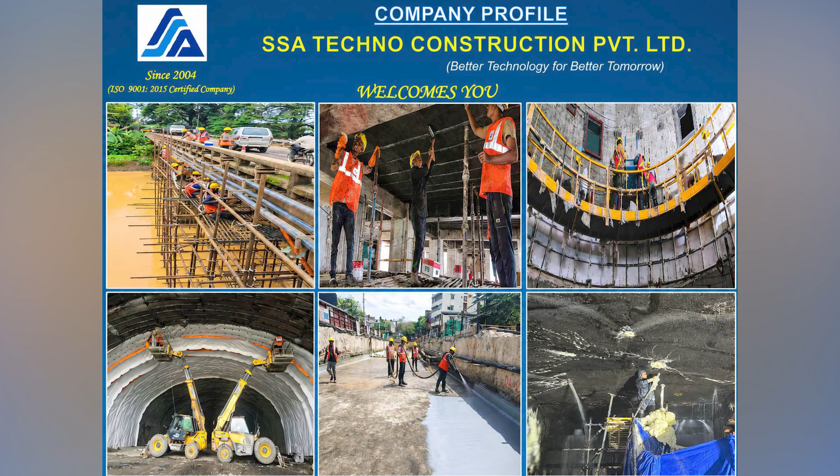Founded in 2004 by Mr. Ashok Kasana in a modest 10 by 10 feet room, SSA Techno Construction Private Limited has grown into a pan-India engineering powerhouse. With its registered office in Delhi and branch offices in Mumbai, Kolkata, Chennai and Patna, SSA Techno has successfully executed over 1,000 projects nationwide. The company boasts a strong technical team of professionals, engineers and supervisors, and a workforce of over 500 skilled and unskilled workers, making it a key player in specialized civil engineering services.

Core strengths: pioneers in specialized construction services, pan-India project execution capabilities, rapid and high-quality project delivery, cutting-edge technologies and materials, trusted by India's leading government and private institutions.

Verticals of excellence. SSA Techno operates across 5 major verticals, providing end-to-end specialized solutions. Structural rehabilitation of RCC and steel structures: projects include high-rise buildings, tunnels, dams, bridges, chimneys, airports, power and cement plants, and many more. Techniques: carbon fiber wraps, glass fiber wraps, laminates, FRP systems, steel jacketing, microconcrete, high-strength R4 mortars, etc.

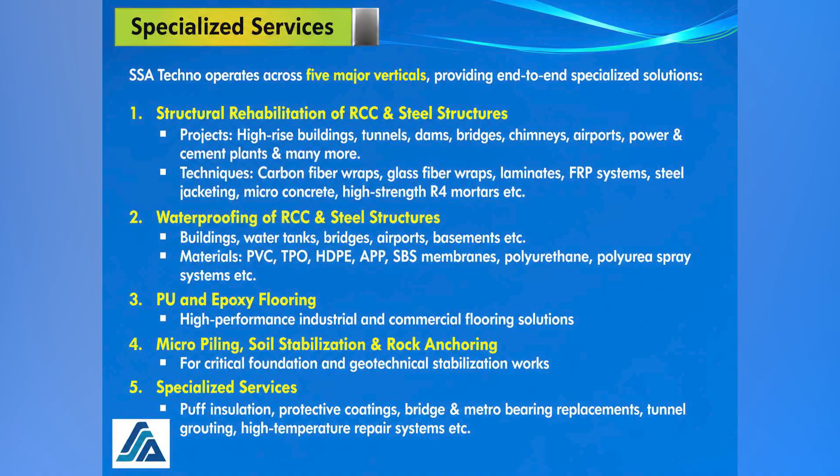PU and epoxy flooring, high-performance industrial and commercial flooring solutions, micropiling, soil stabilization, and rock anchoring for critical foundations and geotechnical stabilization works. Specialized services: Puff insulation, protective coatings, bridge and metro bearing replacements, tunnel grouting, high temperature repair systems, etc.

Business vertical contribution: 60% structural strengthening, 25% waterproofing, 15% specialized services, flooring, insulation, anchoring, etc.

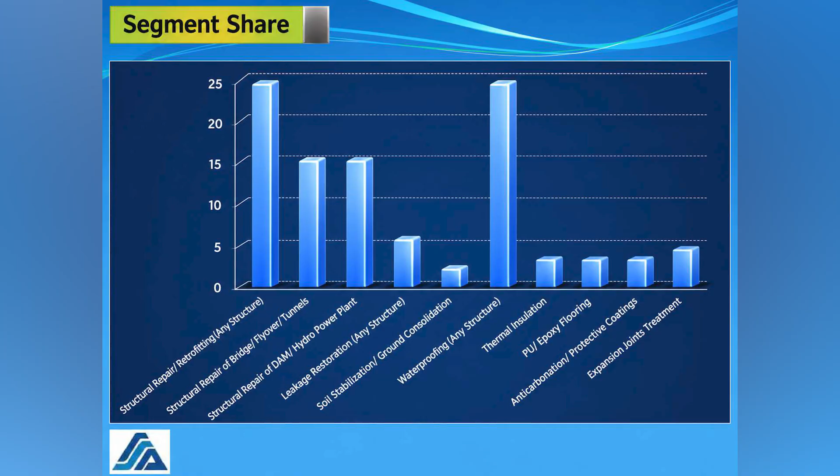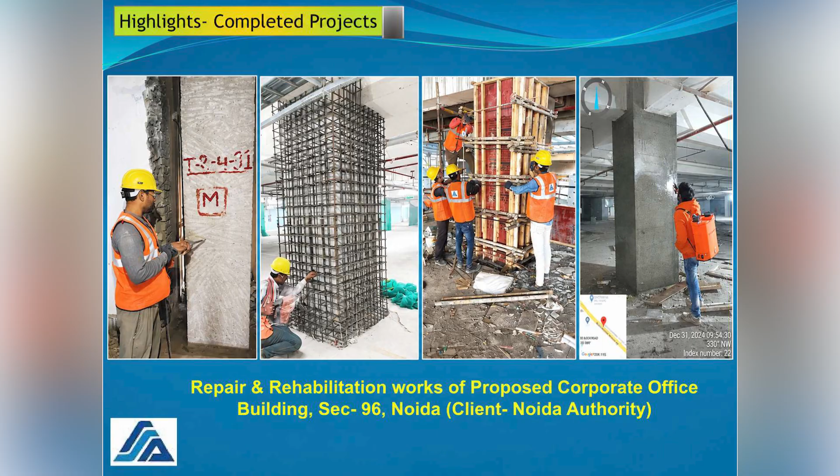Major credentials: completed and ongoing projects. Noida Authority Corporate Office, Sector 96, Noida. First in India to use 3-layer and 6-layer 600 GSM carbon fiber wraps. Used over 1,000 tons of microconcrete. Delivered in just 4 months.

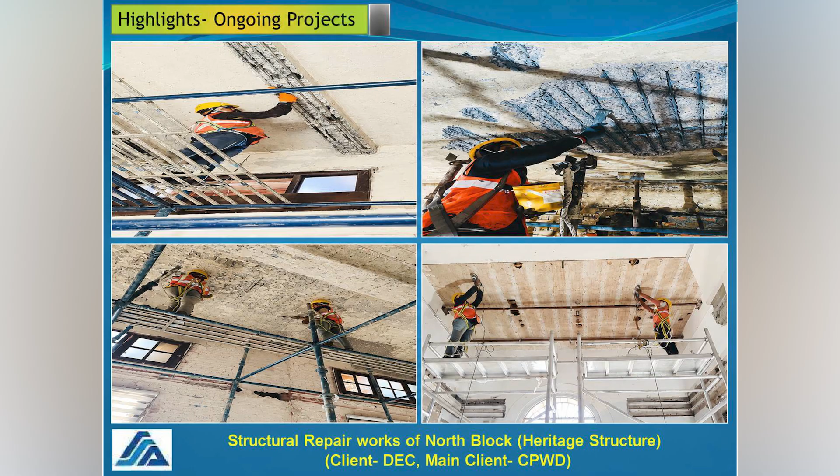IIT Roorkee, project consultant. North Block heritage structure. Strengthening of the RBC and RCC structure with carbon wrap and laminate, etc. SPA Bhopal, project consultant.

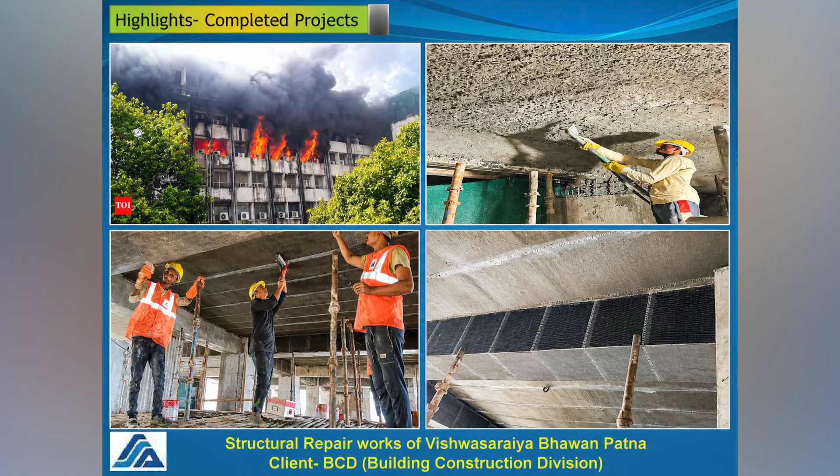Vishwasaraiya Bhawan, Patna, post-fire rehab. Structural recovery of 2 fire-damaged floors. Use of carbon fiber wraps, high-strength repair mortar, microconcrete, etc.

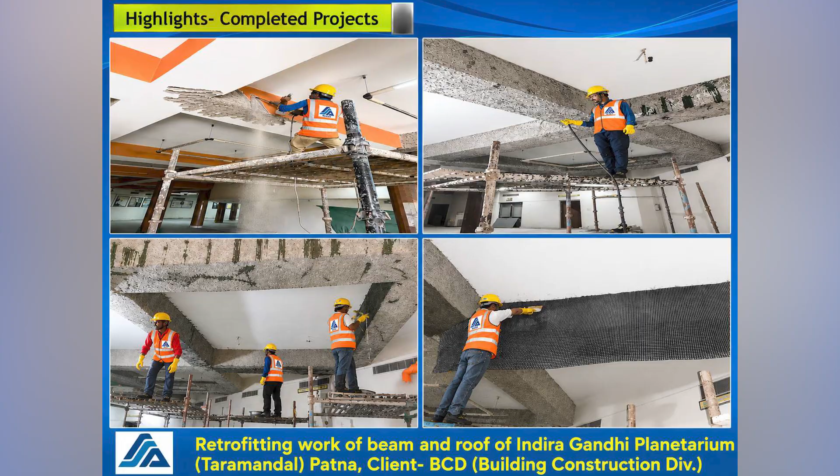IIT Patna, project consultant. Indira Gandhi Planetarium, Taramandal Building, Patna. Structural strengthening work of beam and slab with fiber-reinforced concrete, mortar, etc.

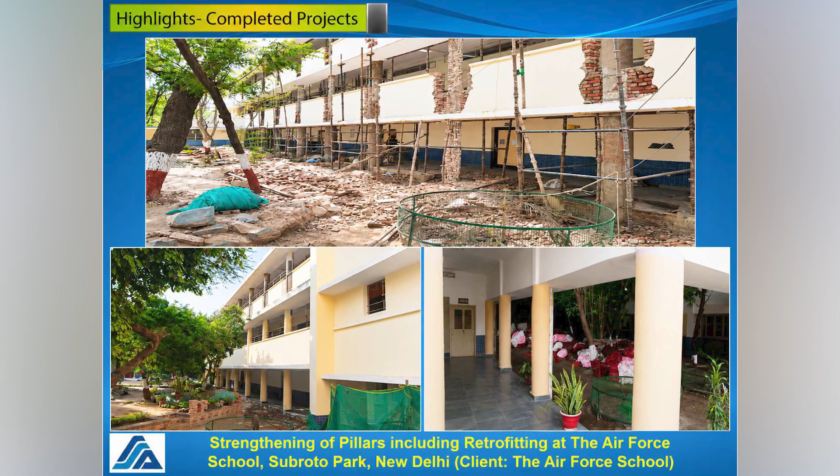IIT Patna, project consultant. Air Force School, Subroto Park, New Delhi. Constructed in 1967, one of the most prestigious historical schools in New Delhi. Structural strengthening work of columns, beams and slabs was carried out without changing the appearance of the structure.

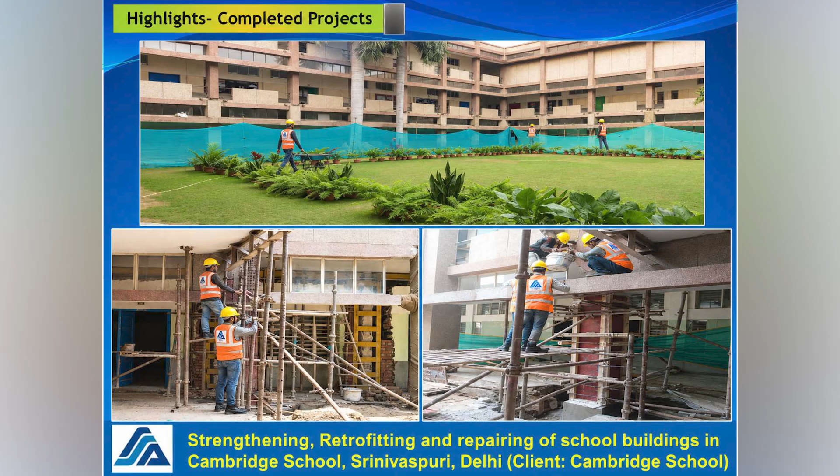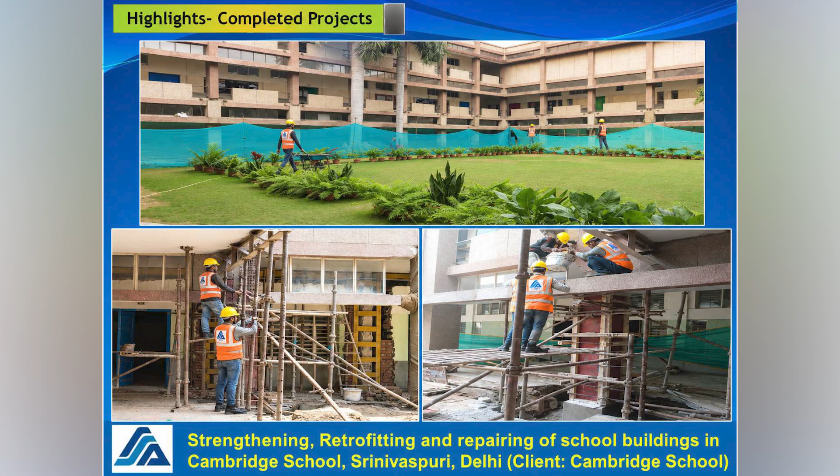Cambridge School, Srinivaspuri, New Delhi. Constructed in 1961, also one of the most prestigious schools in New Delhi. Foundation stone was laid by Vice President of India, Dr. S. Radhakrishnan. Structural strengthening work of columns, beams, and slab using microconcrete and steel jacketing was carried out without changing the appearance of the structure.

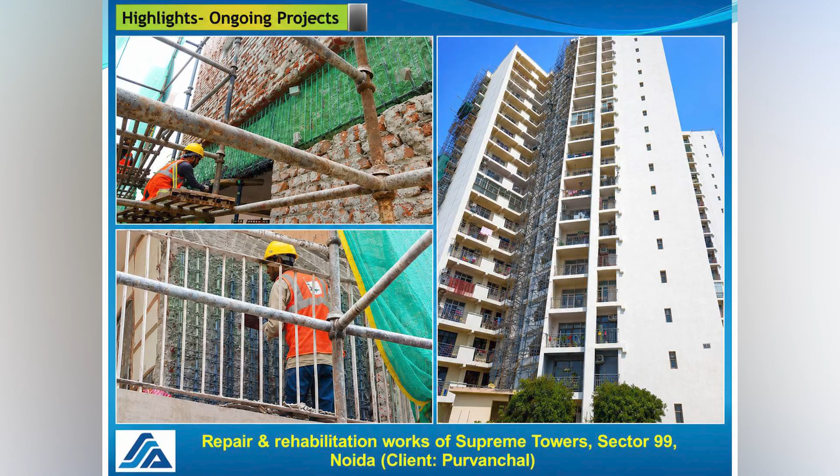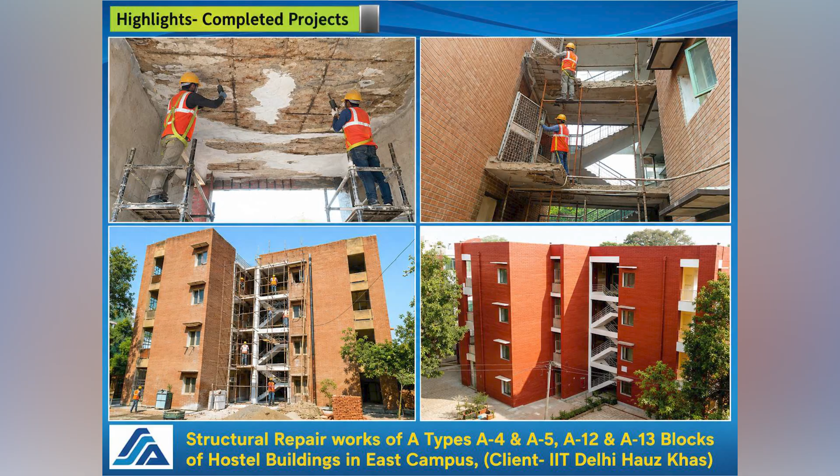Supreme Towers at Sector 99, Noida. Structural rehabilitation with microconcrete, PMM, etc. Structural consultant, IIT Delhi. IIT Delhi hostel block Hauz Khas. Structural rehabilitation with microconcrete, PMM, glass fiber wrap, and other specialized construction material. Structural consultant, IIT Delhi.

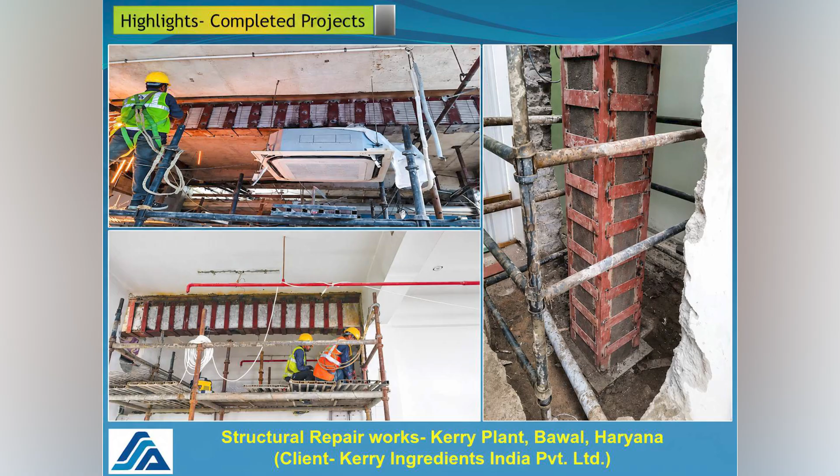Kerry Ingredients Plant, Bawal, Haryana. Structural rehabilitation with steel jacketing and microconcrete, etc. Completed ahead of schedule. Appreciated and rewarded by Kerry management.

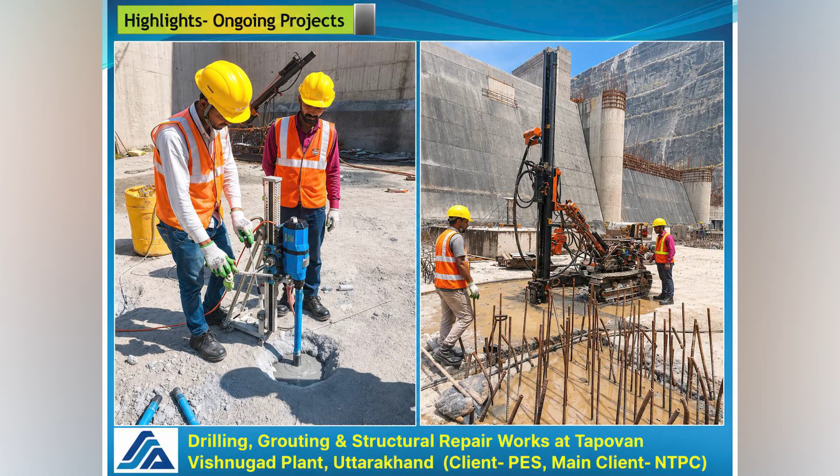NTPC Tapovan, Vishnugad, Uttarakhand. Core cutting, drilling with ROC, anchoring and ground stabilization with cement grouting. Strengthening with microconcrete, PMM, etc.

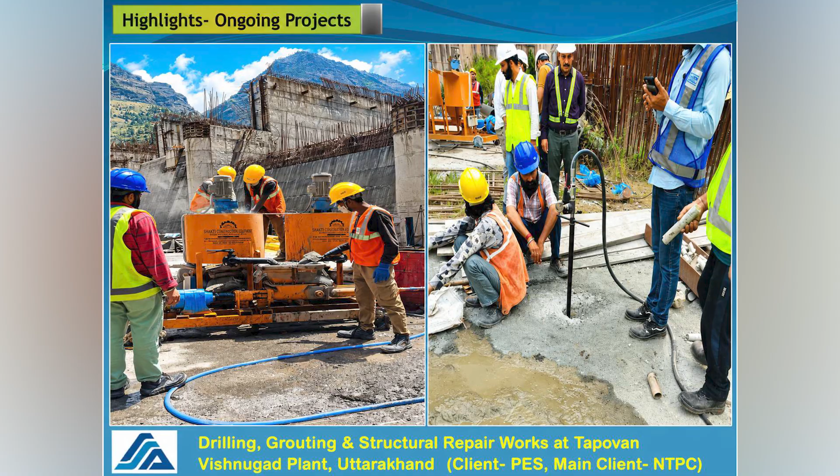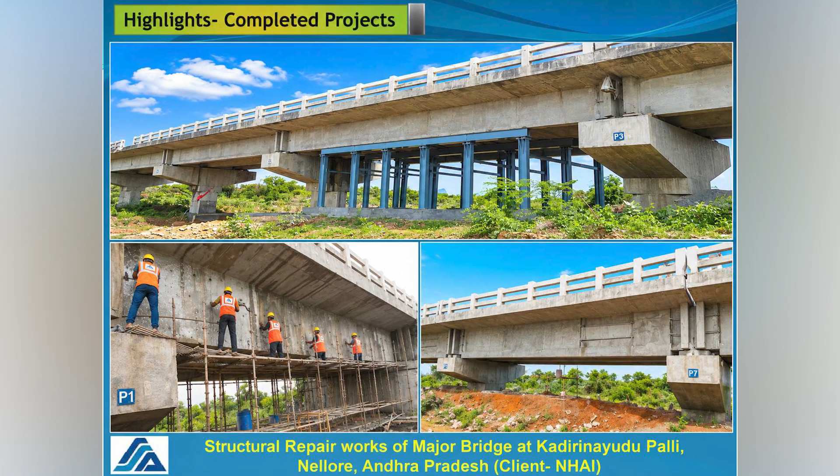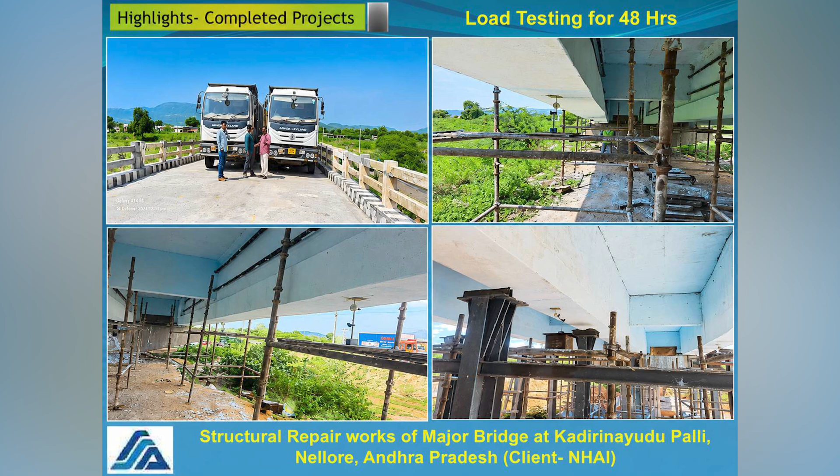NHAI, Kadirinayudu Palli Bridge, Nellore, Andhra Pradesh. Strengthened with externally pre-stressed HD strands. Microconcrete used. Load tested for 48 hours. Opened successfully for traffic post testing.

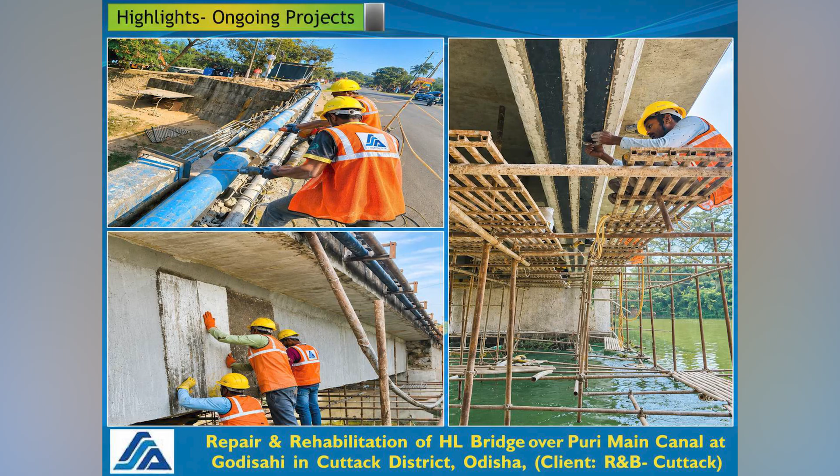HL Bridge over Puri Canal, Godisahi in Cuttack, Odisha. Strengthened with chemical injection, microconcrete, shotcreting, carbon fiber wrap, anti-carbonation protective coating, etc. Client R&B Cuttack.

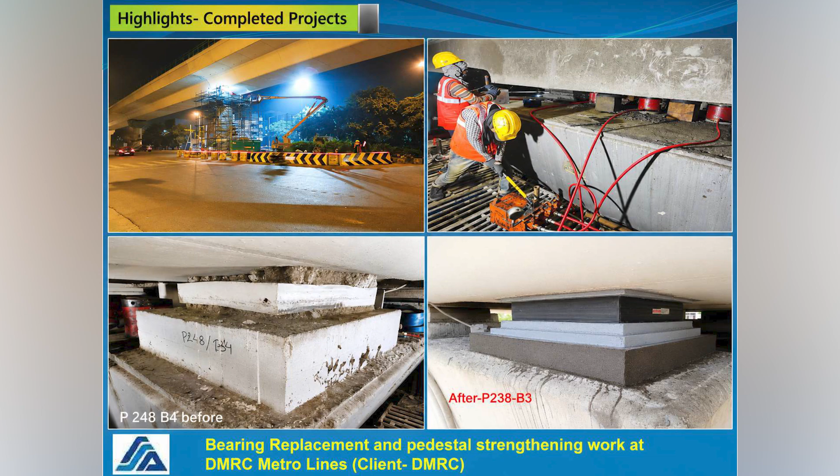Delhi Metro projects. Bearing replacement and pedestal strengthening work executed between 11:30 p.m. and 4:30 a.m. without affecting operations.

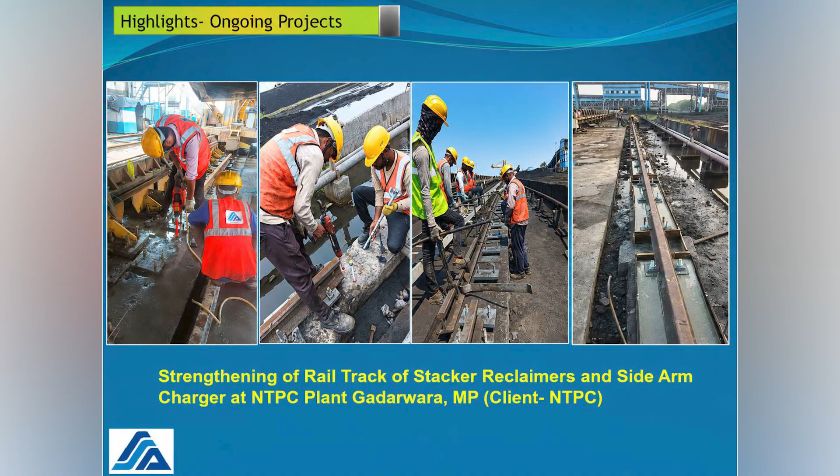NTPC plant, Gadarwara, Madhya Pradesh, and APCPL plant, Jhajjar, Haryana. Strengthening of rail tracks of stacker reclaimers and sidearm charger with Hilti anchor bolts and high-strength repairing material. This is a special kind of work and only a very few companies in India have experienced manpower for it.

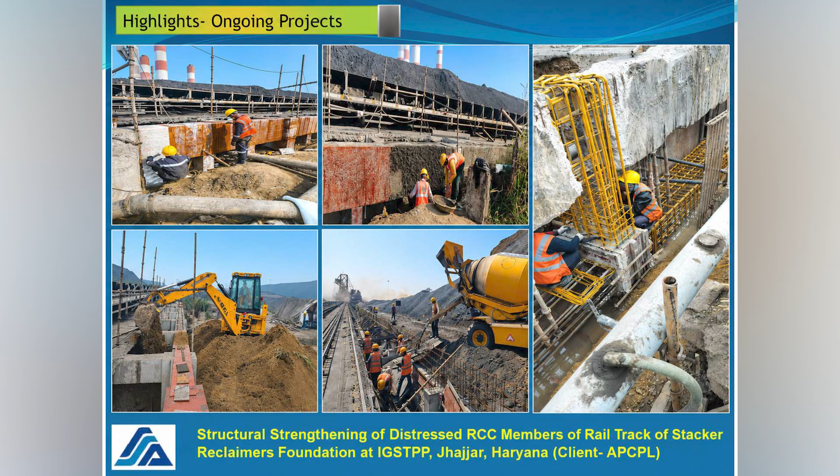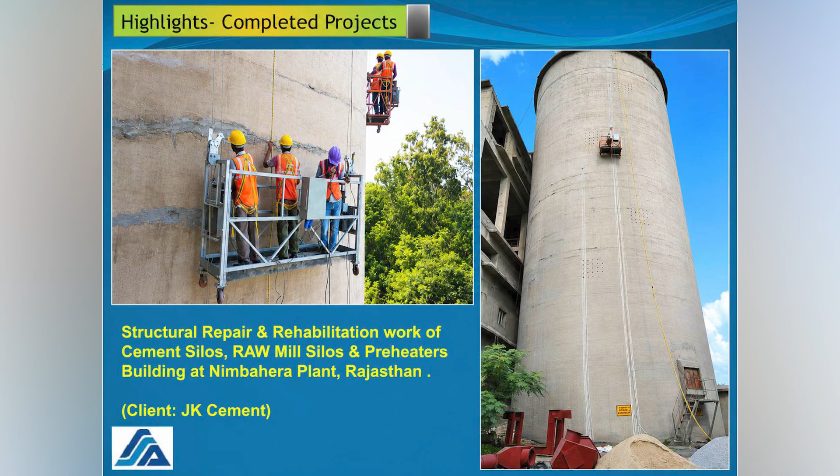JK Cement plants, Muddapur, Karnataka, and Nimbahera, Rajasthan. Structural strengthening work of inner lining of clinker silo with high temperature resistant repair mortar, etc. at JK Cement plant, Muddapur. Structural strengthening work of cement silos, raw mill silo, and preheater buildings with microconcrete, PMM, etc. at JK Cement plant, Nimbahera.

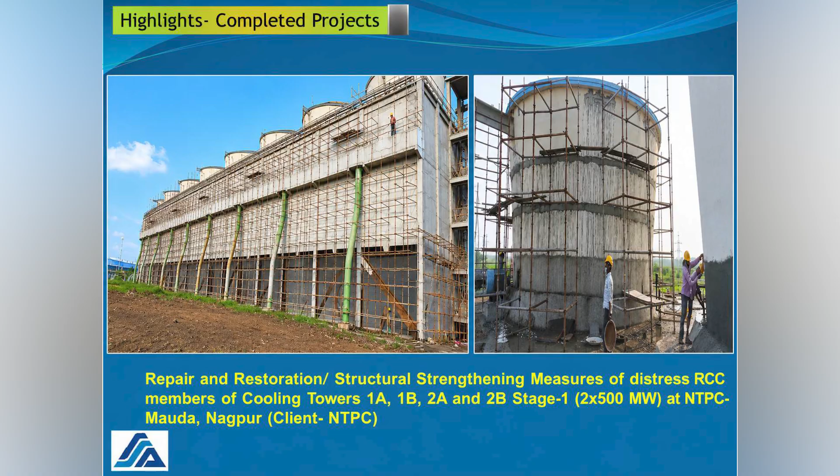NTPC Mauda, Nagpur, Maharashtra. Strengthening of RCC distressed members of cooling towers with microconcrete, high-strength repairing mortar, etc. NHDC Indira Sagar Dam, Khandwa, MP. Spillway repair with R4 category high-strength repair mortar, etc. Parabolic height, 60 meters. Challenging execution with high safety standards.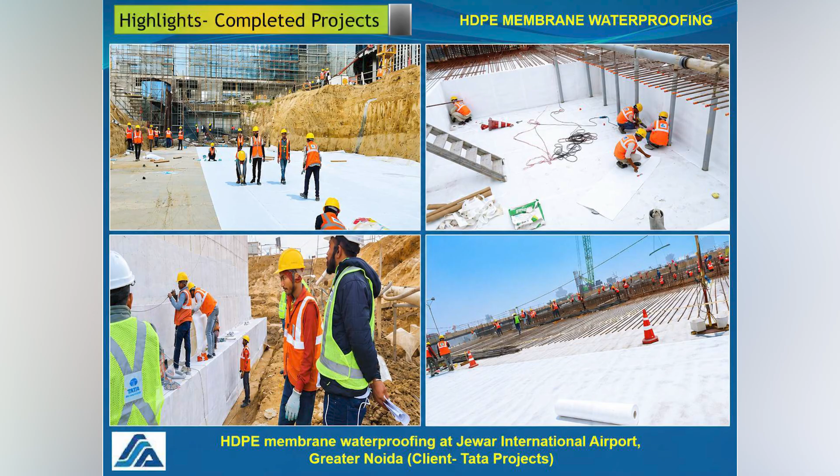Jewar International Airport, Greater Noida, UP. Largest in Asia and the fourth biggest airport in the world after completion. Over 60,000 square meters of HDPE waterproofing work completed.

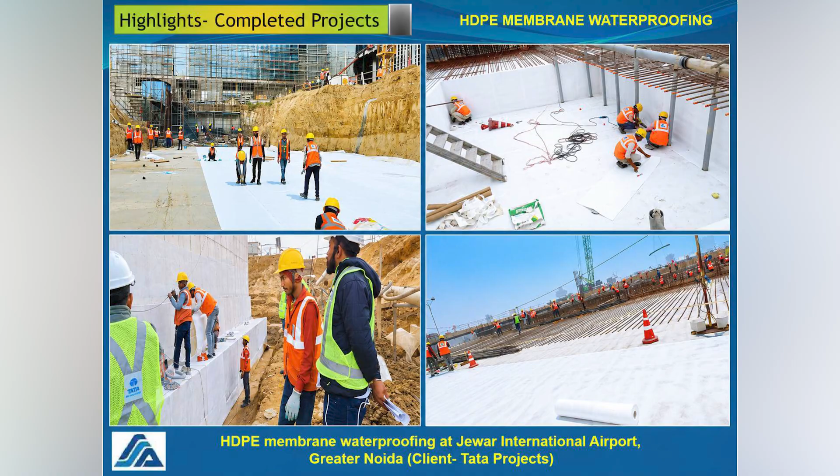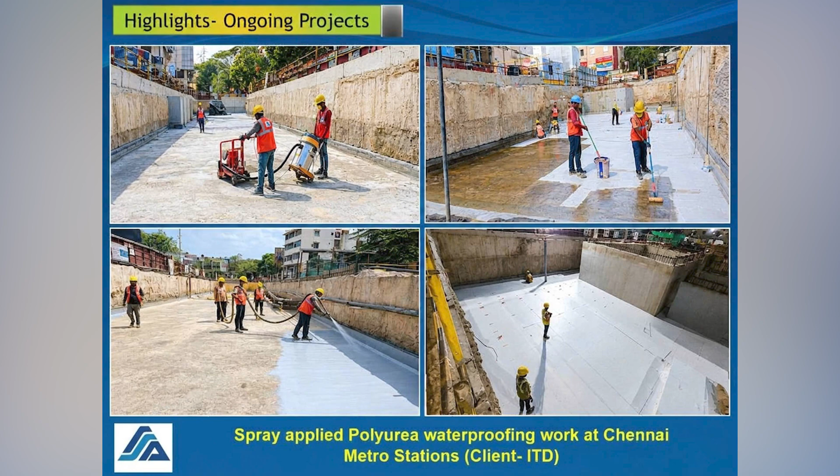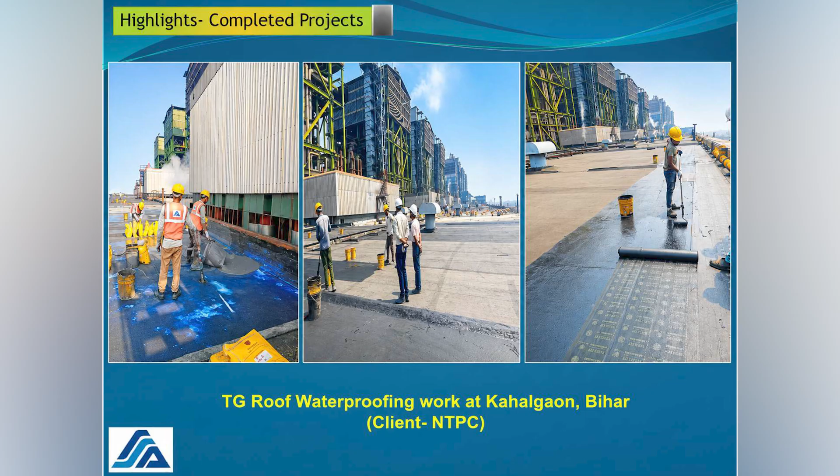DRDO project SSPL, Timarpur. PVC and geotextile waterproofing system was laid. Chennai Metro: polyurea and HDPE waterproofing work of metro stations. NTPC Kahalgaon, Bihar. TG waterproofing work comprising of PU-based coating and self-adhesive tar-felt APP membrane with solar reflective coating.

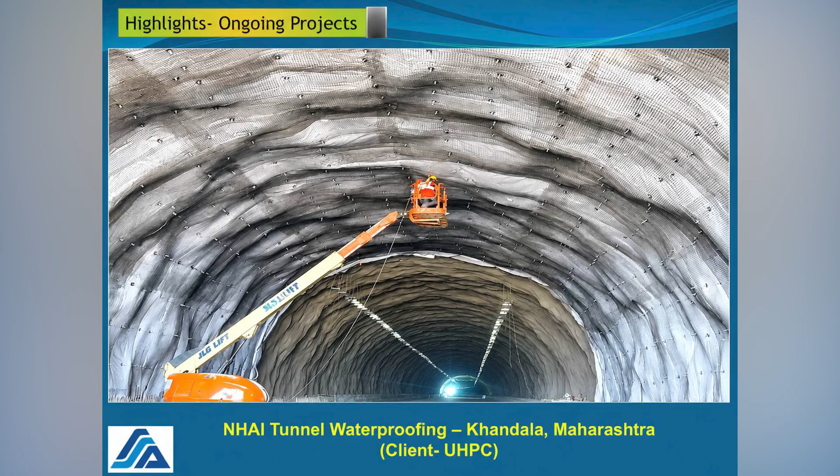NHAI Tunnel, Khandala, Maharashtra. First time post-construction tunnel waterproofing with PVC membrane system. Complex execution using cherry picker and manlift.

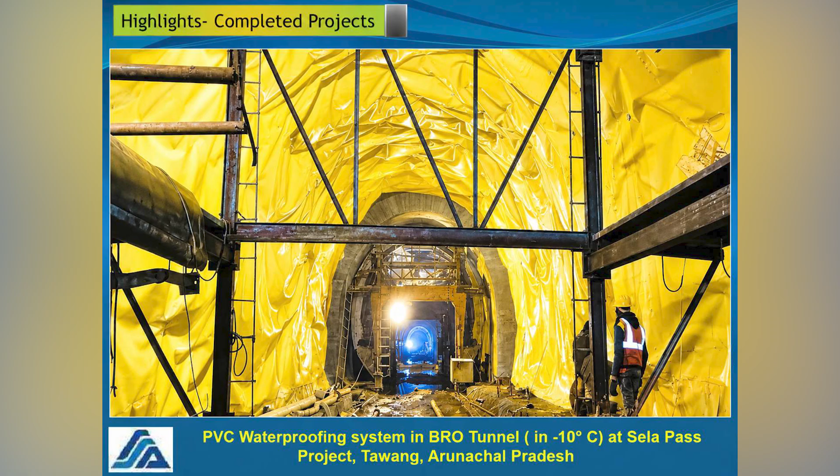BRO Tunnel, Sela Pass, Arunachal Pradesh. PVC waterproofing system was executed at -10 degrees temperature under extreme weather conditions.

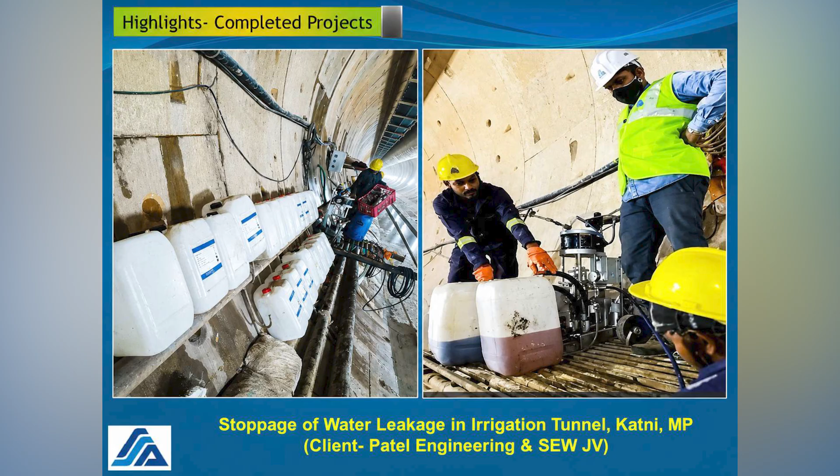Irrigation tunnel, Katni, Madhya Pradesh. Treatment of leakages using chemical grouting. DLF Hamilton Tower, Gurgaon. PU and epoxy flooring completed to high standards.

Our esteemed clients. SSA Techno is a trusted partner for major public and private organizations, including government and PSUs: NHAI, NHPC, NTPC, NHDC, APCPL, CPWD, PWD, DMRC, Indian Railways, NITs, IITs, Noida Authority, IOCL, CPCL, RNB, and many more.

Private sector giants: DLF, L&T, Tata Projects, Godrej, Afcons, Shapoorji Pallonji, Megha, Kerry Ingredients, APCO, Patel, NEC, ITD, Gammon, JK Cement, and many more.

Why SSA Techno? Only Indian company operating across all 5 specialized construction verticals. Deep technical expertise, backed by prestigious institutions like IIT Roorkee and IIT Patna. Innovation driven, with first-time applications of global technologies in India. Proven ability to deliver complex and time-critical projects.